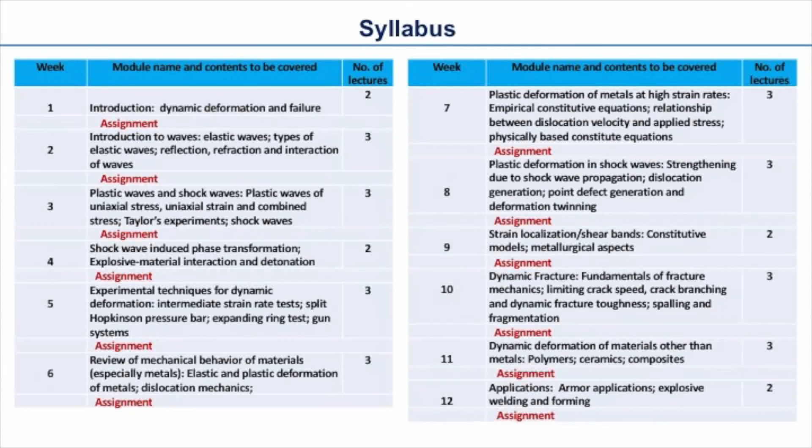So this is the syllabus. We divide it into 12 modules and this is just a tentative schedule. We will have an assignment after each module and the assignments will have equal weightage. We will discuss the syllabus a little later. Total lecture hours will be 30 hours. We may need a few more hours to finish this syllabus.

I will have teaching assistants for this course. 3 of my PhD students will help me in this course. They are Mr. Akshay Namdev, Mr. Bikramjyoti Sohoria and Mr. Samrat Tamuli. They will be happy to help you out during this course.

We will be using these books as textbook or reference books. Dynamic Behavior of Materials by Marc Meyers, we will consider that as a textbook. Marc Meyers is a professor in the University of California, San Diego. For stress waves, Stress Waves in Solids by H. Kolsky and Wave Propagation in Elastic Solids by J.D. Achenbach are some of the references.

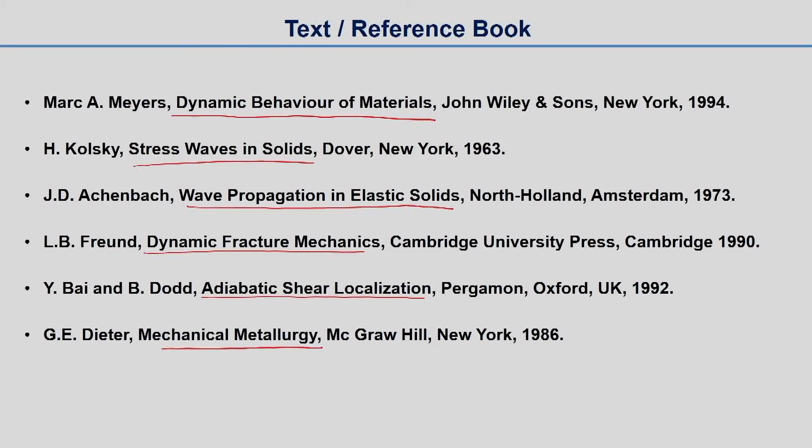Similarly, for dynamic fracture, the book by L.B. Freund, and for adiabatic shear localization, the book by Y. Bai and B. Dodd, we can keep as reference. And for review of the mechanical deformation of metals, we can use the classic book on mechanical metallurgy by G.E. Dieter. So let us discuss why we need to study this course.

Behavior of materials under dynamic loading, that is high speed loading, is very different than behavior of materials under quasi-static loading, that is slow loading. That means we need to consider material parameters to predict the behavior of materials under dynamic loading. These parameters are different than what we obtain from our quasi-static test. However, the material parameters under dynamic loading are not easily available like our quasi-static material parameters.

Also the deformation mechanisms and failure mechanisms under dynamic loading are more complicated as compared to quasi-static loading. Therefore, scientists and engineers are still trying to understand many dynamic processes and the dynamic mechanical behavior of various materials.

Let us consider these two figures. On the left hand side is a UTM, universal testing machine, made by Zwick Roell. As most of us have performed quasi-static tests in a UTM, we know how to obtain a stress strain curve from these tests. On the right hand side is a representative image. I clicked this image in the Mercedes-Benz Museum in Stuttgart, Germany.

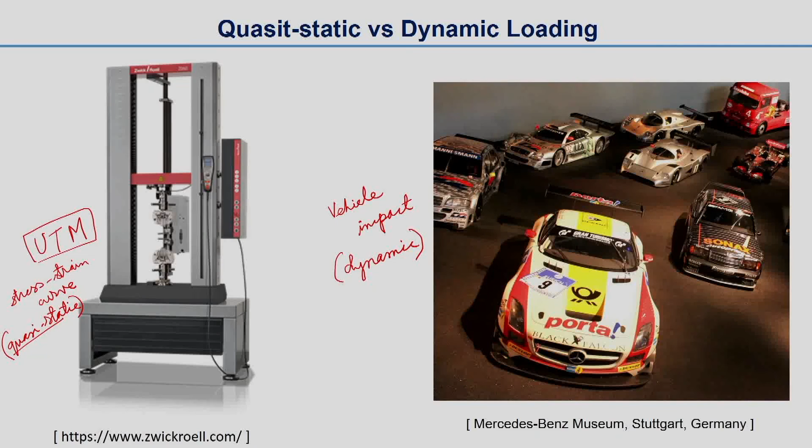Before discussing the difference between dynamic loading and quasi-static loading, I would like to remind you of this simple physics. We know that kinetic energy increases with the square of the velocity. Here we are taking a high speed bullet hitting a metal target. It's a metallic target.

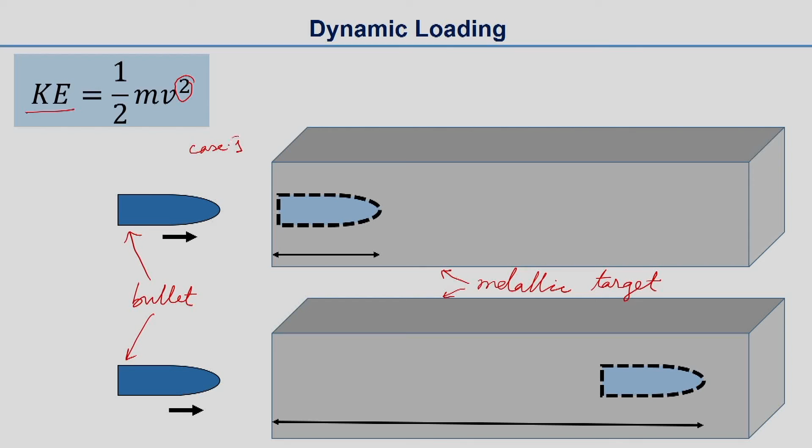There are two cases here, as you can understand from the figure, case 1 and case 2. In the first case, the bullet has a velocity small v, and in the second case the bullet travels much faster. It has a velocity 2v.

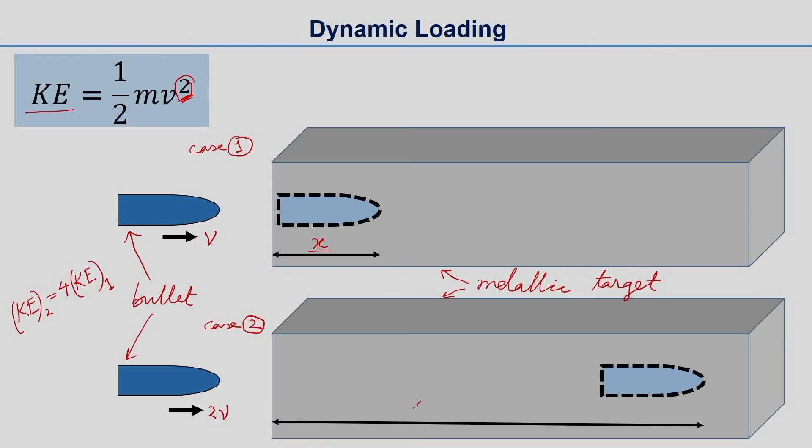As kinetic energy increases with the square of the velocity, the kinetic energy in the second case will be 4 times that of the first case, and if all other conditions remain same, the penetration will also be 4 times. That is, if in the first case the penetration is x, then in the second case the penetration will be 4x. Now let us again discuss the difference in deformation mechanism between quasi-static and dynamic loading.

Here we have 2 hammers hitting a target. Basically there are 2 cases here, case 1 and case 2. We have a hammer in both the cases, and we have the target material.

So in the first case we are hitting the target at a very slow speed, and in the second case the loading is rapid, that is, we are hitting the target with a high speed. So in the first case this is slow, that is why we can call it quasi-static, and the second case is an example of

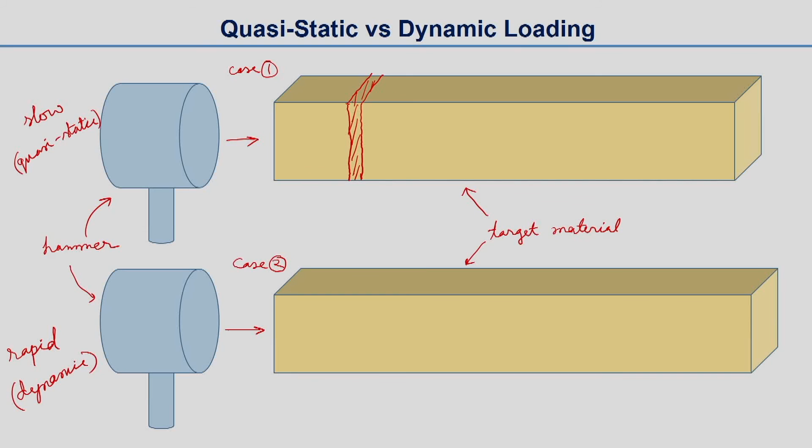dynamic deformation. So if we take a very thin section out in the first case, we will get to know that this thin section will be in static equilibrium with its surrounding parts. If you go to the left side or right side, this section will be in equilibrium with the surrounding.

But now in the dynamic case, if we take a thin section, when you hit the material with the hammer, the stress experienced in this thin section will be different than the other sections. Let us say we have section number 2 and this is the first section.

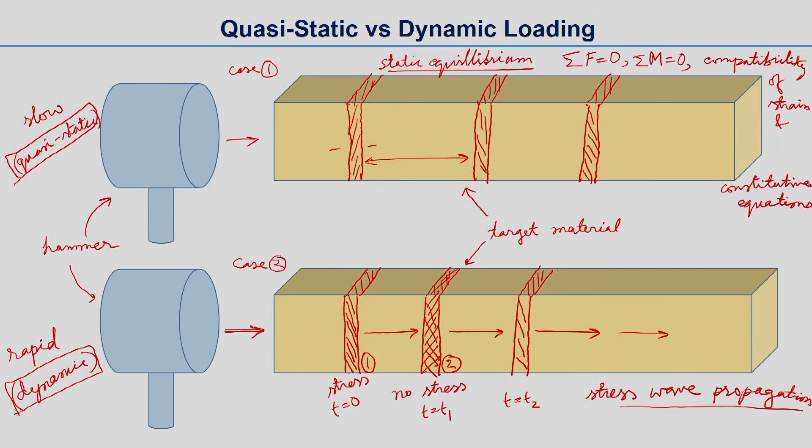In the dynamic loading case, however, we have an additional consideration. We need to consider this stress wave propagation. Okay. So let us discuss another aspect of dynamic loading. Materials show strain rate sensitivity. So let us discuss what this material strain rate sensitivity is. The flow stress of a material increases with strain rate; that is called strain rate sensitivity. Flow stress means the instantaneous stress in the plastic deformation part of the stress strain curve.

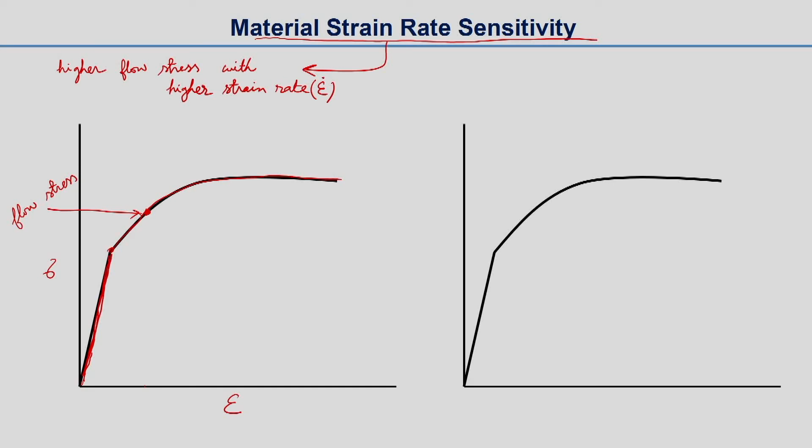Basically, this is positive strain rate sensitivity. There can be sometimes negative strain rate sensitivity as well, but let us discuss what is strain rate. So, if you take a material, let us say one sample, and you are trying to load it in tensile loading in the UTM, let us say the dimension of this material is 0.1 meter, which we will write as L naught, and the velocity of the extension V naught is equal to 1 meter per second.

That means the material extension is at 1 meter per second. Then the strain rate epsilon dot will be equal to delta epsilon divided by delta t. Delta epsilon can be given as delta L divided by L naught, and delta t as delta L divided by V naught, which will give you V naught by L naught, and that will be 1 meter per second divided by 0.1, equal to 10 per second. So if you have a 10 centimeter long sample and you are doing a tensile test with velocity V naught equal to 1 meter per second, then your strain rate will be 10, and the unit of strain rate is second to the power minus 1.

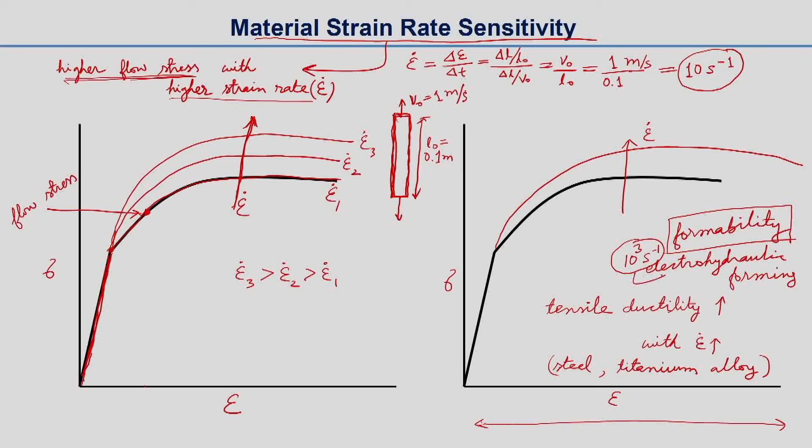For example, electrohydraulic forming, which is at a strain rate of 10 cube per second. Electrohydraulic forming is performed at 10 cube per second.

So, what we discussed so far is the dynamic deformation mechanisms. Now, we will talk about dynamic failure mechanisms. There are some failure mechanisms which are unique to dynamic loading and are not seen in quasi-static loading. The first one is shear band, or severe shear strain localization, and the second one is dynamic fracture.

So, in the shear band at a high strain rate, most of the work, almost 90% of the work done in plastic deformation, is converted into heat. It happens at high strain rate. Basically, this is the initial configuration, and when you are shearing the material, there are two cases we are showing. The first one is slow loading, which is the quasi-static case, and the second one is dynamic, which is high speed loading, at high strain rate.

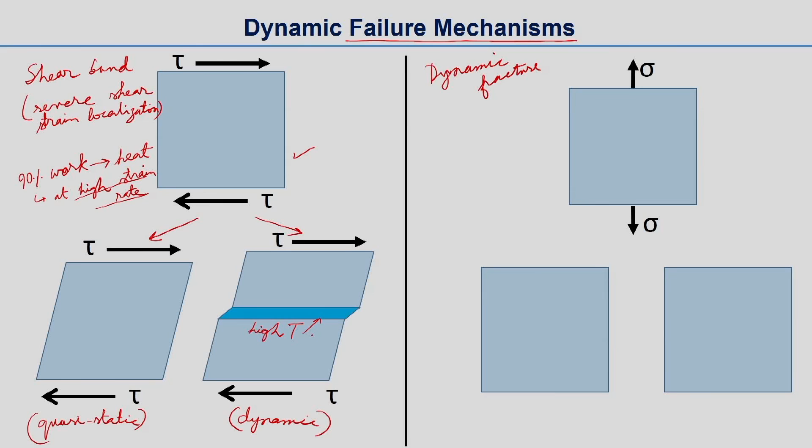Most of the work spent in plastic deformation is converted to heat, and due to that heat, high temperature is generated at some local area, and because of that the material softens in that part. Due to the high rate of loading there is not much time to diffuse the heat away from this area. So basically this part would be softened due to high temperatures, and it will have severe shear strain localization.

So, that is why you can see the deformed shape is different than what we have seen in the quasi-static case. Why is it called a shear band? Because, as you can see, the thickness of this part is very small. The thickness of that part can be 10 to 100 microns, but it is not always the case. Sometimes the shear strain localization may not form a very thin region or band, but many materials show a very thin band. That means the band is effectively two-dimensional; the third dimension is very small. That is why it is called a shear band.

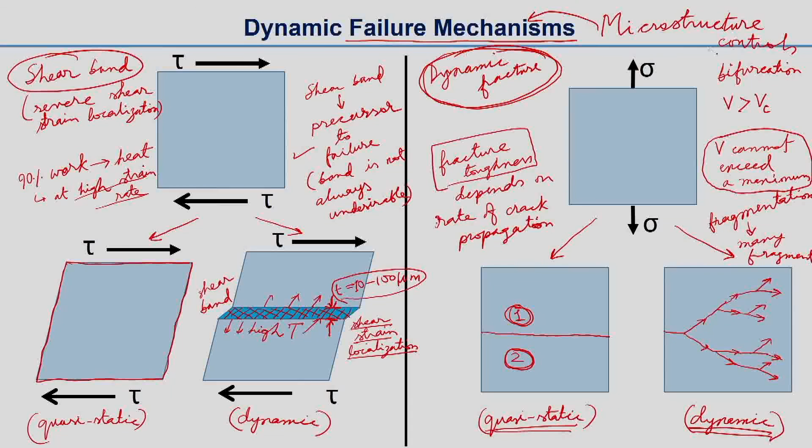And also one thing is very important for both shear bands and dynamic fracture: the microstructure of the material controls the failure mechanisms. So both of these failure mechanisms, shear bands and dynamic fracture, are controlled by the microstructure. We will discuss those details later. So we have already discussed the deformation mechanisms and failure mechanisms under dynamic loading.

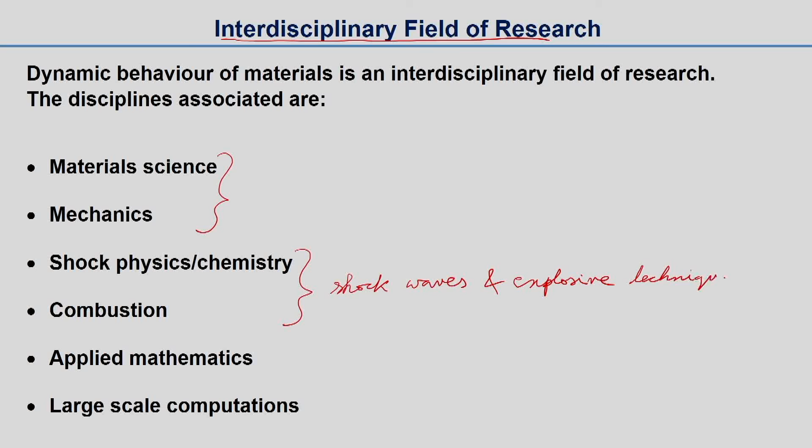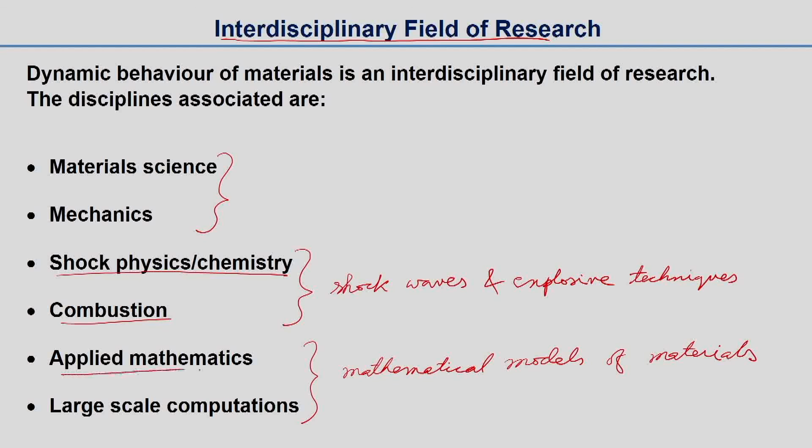Now we should know that the dynamic behavior of materials is an interdisciplinary field of research. Let us see what disciplines are associated with it. The knowledge of material science and mechanics is very important to study the dynamic behavior of materials. We will also discuss shock waves and explosive techniques of dynamic deformation. This will require knowledge in shock physics, chemistry and combustion. Also, mathematical models of materials need to be studied for predicting material behavior, which requires applied mathematics, and it also involves large scale computations.